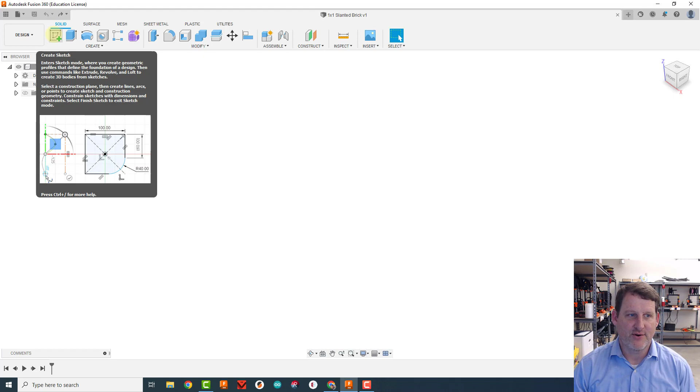To do this, I'm going to click on the Create Sketch button right here. It's going to ask me where I want to create a sketch. If I move my mouse around, I can be on the front face, the side face, or the bottom face. Because I'm creating a sketch of the side face, I'm going to choose the side face. I'm going to click, and it's going to rotate that around for me and create a sketch.

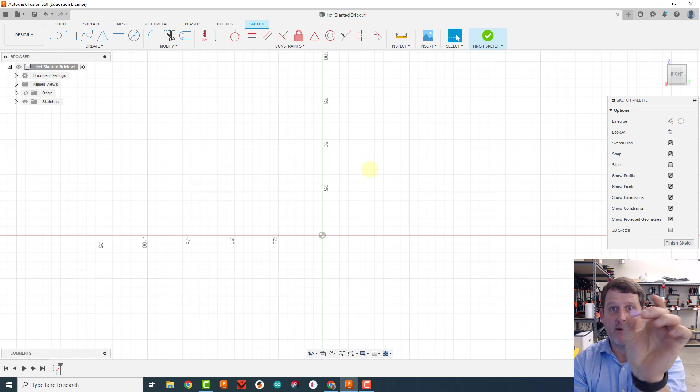Now what I'm going to do is actually start in this back corner here. I've got a bunch of these pieces - if you want one, you can grab one and totally do this as well and follow along. So I'm going to start at this back corner, sketch along the bottom, up here, and around the two sides.

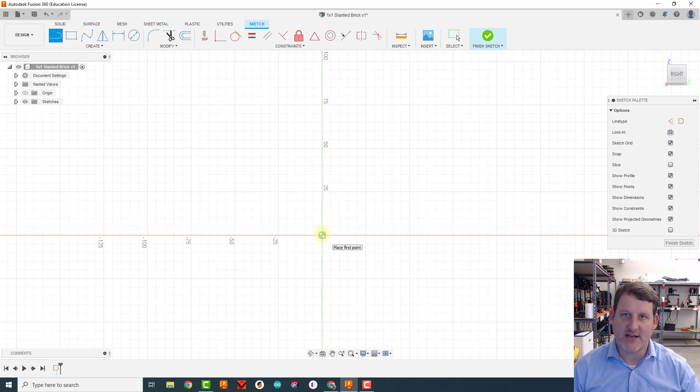Let's get started. I'm going to first grab a line drawing tool, so I have a line right here. I'm going to go right down to the middle of my sketch - I like to start my sketches when I can right in the middle, it kind of anchors them in one place. I'm going to click and drag a line over. Notice how Fusion is asking me how long is this side.

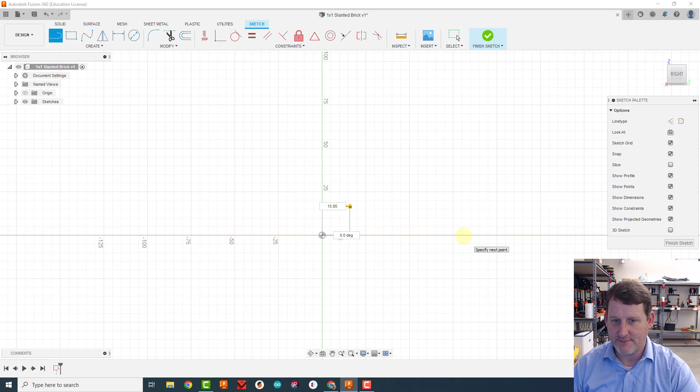So what I'm going to do is grab my handy calipers. I'm going to open them up and measure this bottom edge, which is what I'm putting into the program - that edge right there. And it says 15.85, so I'm going to type in 15.85, make sure it's at 0 degrees straight across, and click to set the measurement.

Notice how it's already asking me, it wants to draw another line. To get out of this, I can hit escape, or I can just draw my next line.

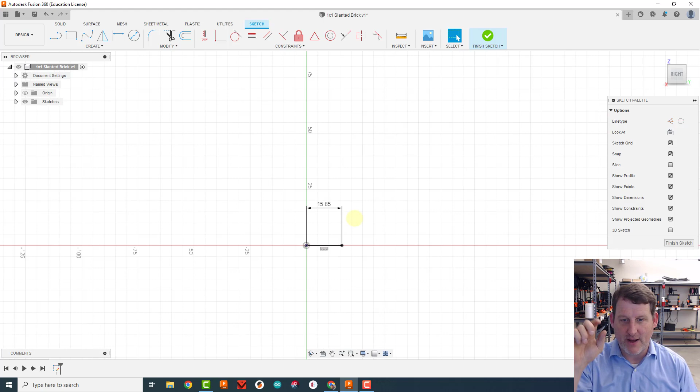I'm going to show you a few things. First, how do you zoom in on an object? Just roll your mouse wheel up or down and it will zoom in and out. I can zoom in really close, or zoom out super far away.

So I'm going to fill most of the screen with the drawing so far. Now notice something else. This part's super hard to get used to, but you will quickly. This looks like we've drawn a rectangle, but we haven't.

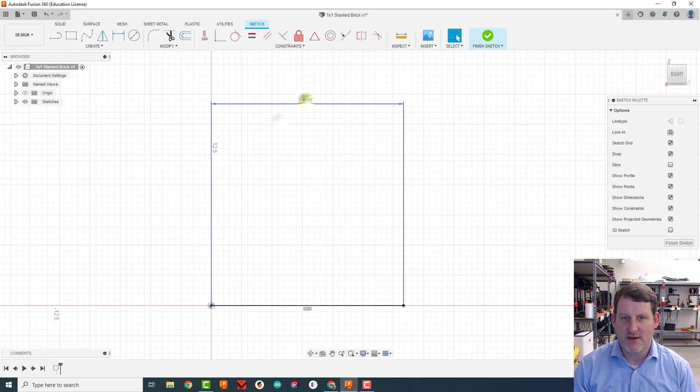This part on top is the measurement line. It tells you that this line, the real line down here, is 15.85 millimeters long. I can click on the 15.85 and drag it down below. It's just telling me how big it is. I can tell because these lines are thin and this line is thick. A thick line is a real line, the thin ones are measurement lines. If that's confusing to you, you'll get used to it soon.

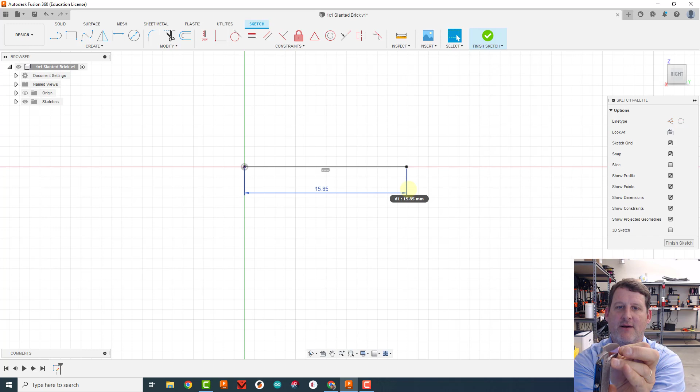The next thing I'm going to do is I've drawn this bottom line now. I'm going to use my calipers and measure how tall that back line is. Along the back edge like this, I'm getting 9.61.

If you want to use calipers and do this along with me, you can use your numbers too, not mine, they'll be a little different. So 9.61, and I'm going to push enter there. Now it's drawn the line for me. Everything's super happy. So far I've got 9.61, 15.85.

I'm working in millimeters right now. To check what you're working in, let's stop and do that. Over here on the left-hand side, it's called Document Settings. If you click this little down arrow, it opens up the settings. Mine say units millimeter. If I want to change that, I would hit this little edit key and choose a different unit. My advice for all the Lego stuff is millimeters because they're really small, it'd be easier numbers to work with. So I'm going to hit cancel.

Next thing I want to do is measure how far across the top is. So I'm going to measure it like this-ish. This one I'm going to be a little bit janky with. I can't get a perfect measurement, but I'm going to get as close as I can and live with it.

I'm getting 8.26. So to draw that part, I'm going to take the line tool, start here on this line, and draw over. I'm going to say 8.26, and hit enter to draw the line.

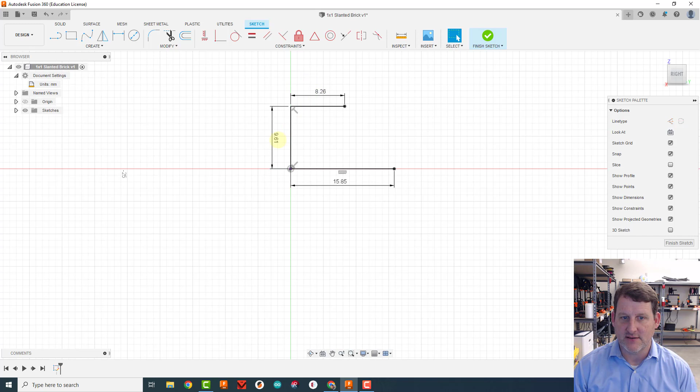So far I've drawn 3 lines: the bottom, the side, and the top. I need to come down at an angle and then connect up with this little one.

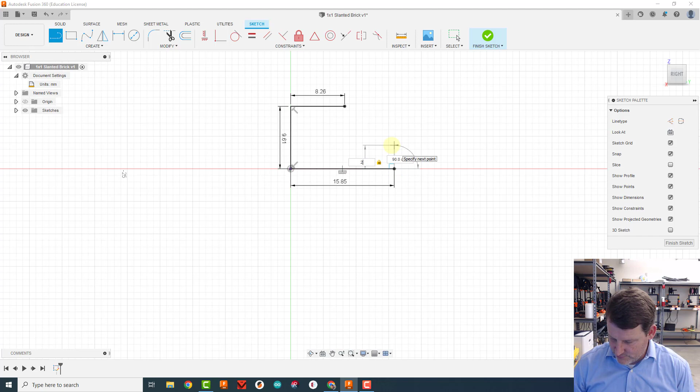To do this, I'm going to measure this little thing right here first. Again, I can't get a really good measurement, but I'm going to get the best I can. I'm getting 2.23 millimeters. So I'll click on my line tool again, come over to this end and drag up, and where it says distance, I'll type 2.23 millimeters and hit enter. That's drawn that line. I'm going to take the measurement which is on the inside and drag it to the outside and just drop it out here.

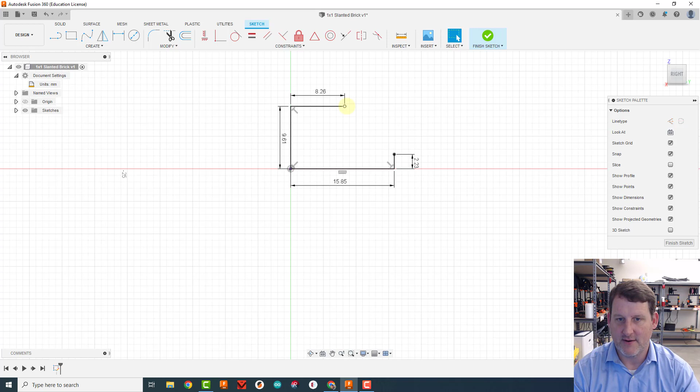Last thing I need to do now is connect this line to this line. That's this sloping part across here. If I've done all my measurements correctly, it should make a very similar feature, it should look just like the Lego I have, the side of it. So down here, all the way to this one, and click. This one I'm not going to enter in a distance for.

Notice that when I do that, let me check a few things. It looks a little wonky to me. Yep, that's good. Yeah, the top is a little wonky. This top is a square, it really should be...

7.8, not 8.2. So here's a nice thing: instead of starting over again, right now I'm in the line tool, so I'm going to hit escape to leave the line tool. I'm going to double click on the 8.26 and change it to the better value of 7.8, and watch what it does. It automatically redoes everything for me. So Fusion is really nice that way.

All right, next thing I want to do is extrude this. But let me show you what I just did before I move on.

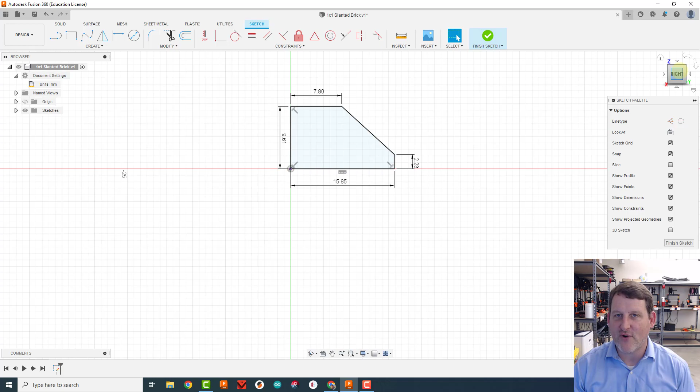In the top right corner of the screen is this cube. If you click and drag on it, hold your button down and move it around, you can actually rotate your sketch in all kinds of weird directions. If you get lost in where you are, rotate it around until you see the word called back, and you're going to click on it. Nope, not back, sorry, it's going to be left side or right side, one of the two.

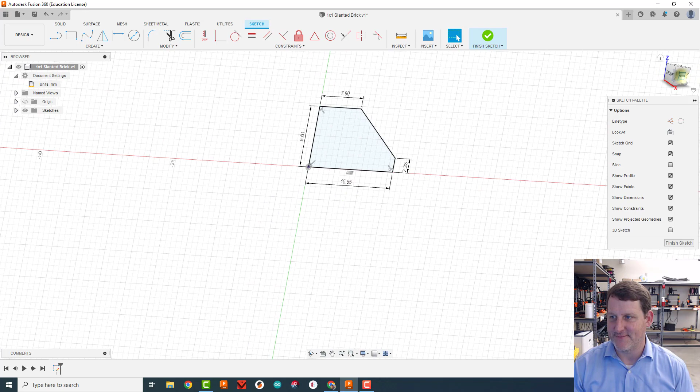I think we did right side, so I'm going to rotate it around. Yeah, we did right side. So you should have that image. If it says right here, you're good.

Okay, so what we're going to do now is we're going to extrude this. We're going to grab this shape and pull it into existence. E for extrude is the easiest way to do it. I'm going to grab my cube here and just tip it a little bit, not too much, just a little bit. Now I can see the arrow that I'm extruding. I can grab this arrow and literally drag it, and I'm making the object now.

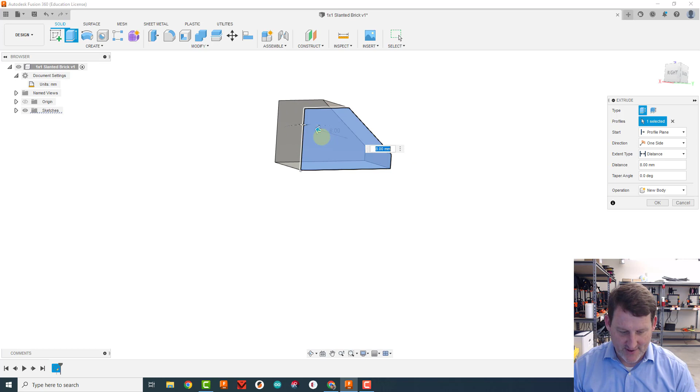So that's pretty cool. To figure out how far I have to drag it, I want to measure how deep this is, how far this is. So I'm going to go right here to the back and measure that. And that's 7.82. Enter. And now I've got my object.

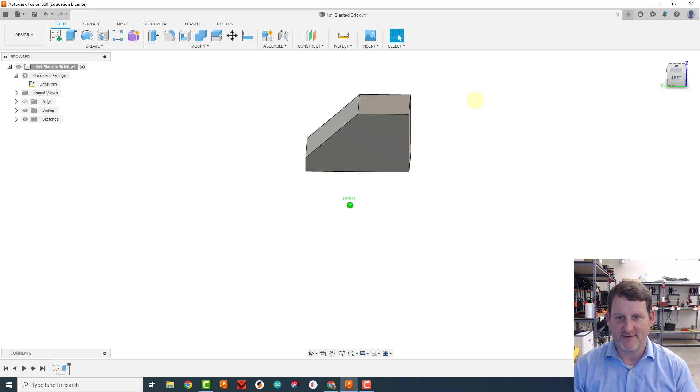If I grab my cube up here, I can rotate it around and take a look at stuff. So that is pretty sweet. We are almost done.

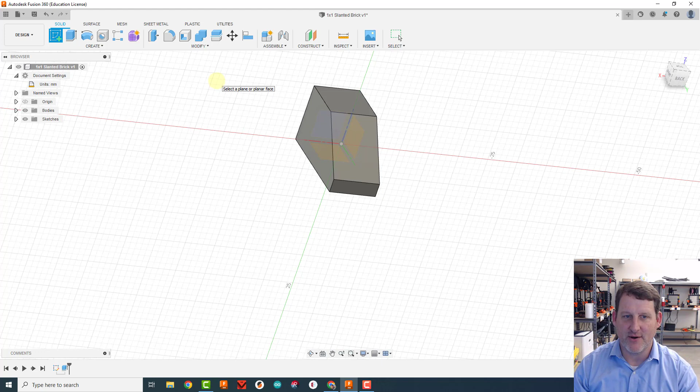I'm going to use what's called a construction line. Now, you're learning a lot right now. You don't have to know all this, so don't get too freaked out about it. I want to know where the middle of this top is. So I'm going to create what's called a construction line.

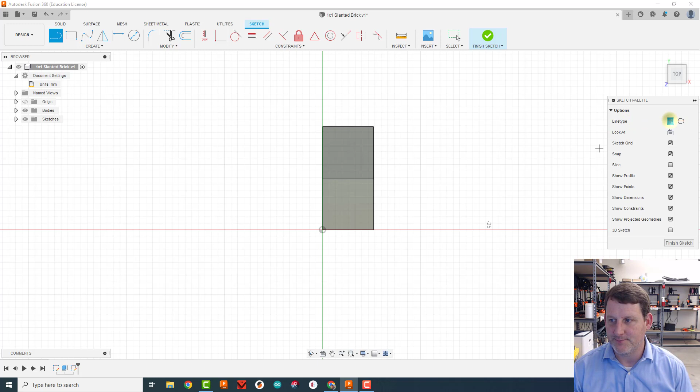I'm going to turn on the line over there, select my line feature, come over here to this options over here where it says line type. I'm going to turn on this first one called construction. And then I'm going to come back over here. Notice how it turns blue.

I'm going to come over here and go to a corner of, oh, here it is. This is the square, this is the top. If I look from the side, that's the slope. That's the top. I'm going to click back onto the top view.

Top corner to bottom corner, or you could have gone in this diagonal this way. And I'm going to add another one actually across the other diagonal. Put an X in there. Where this X crosses is the center of that square.

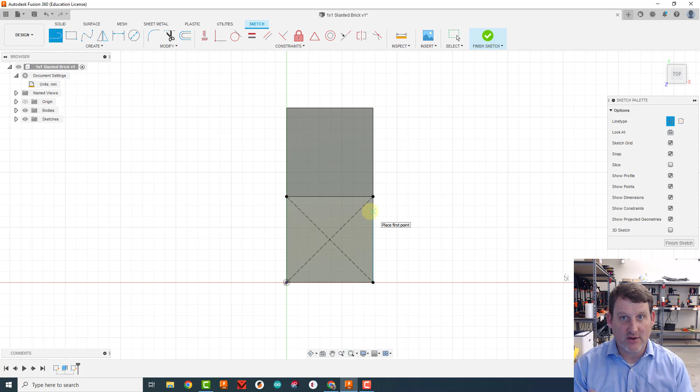Now, one thing you could notice is that when you're doing a construction line, it's a dashed line instead of a solid line. That means that you can't extrude this. We'll talk more about what that means later.

To draw a circle, all I'm going to do is come up here and I'm going to grab the circle tool. I'm going to go down to where I see the center point. A triangle means midpoint or center point. So when you see a triangle, that means you're at the midpoint. I'm going to click on that and drag the circle out.

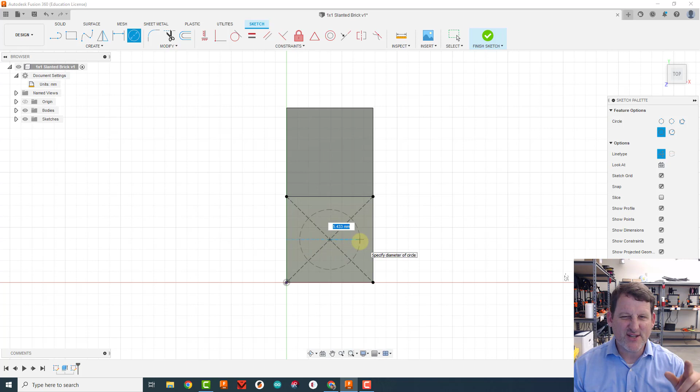Notice the circle is a dashed line. That means my construction line is still turned on. I'm not going to do anything. I'm just going to go over here with my mouse, turn construction line off. Notice how the circle went to a solid line. That's what I'm looking for.

And now I'm going to measure the width of that circle. So I'm just going to put it there like this. I'm going to say 4.78. Enter.

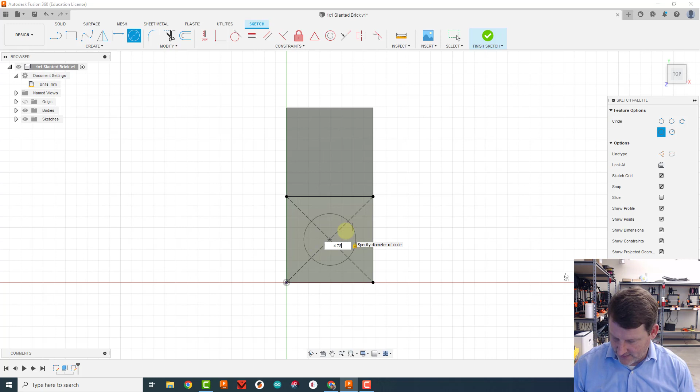Awesome, so that is that circle. But notice that there's no height to it. If I rotate the screen around a little bit, there's actually nothing there yet. I need to go E for extrude, click on that circle.

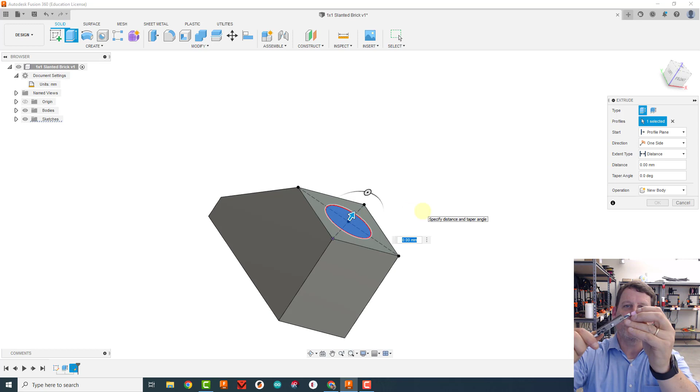And that's it, we made our first model. So we can see it's solid, it's not hollowed out. It's not quite done, but we did a really nice job. We got an idea of what we do. The main process is you create a sketch, draw the shape of the thing you want to extrude, and then extrude it out into reality.

Super cool, great job. I hope you got familiar with stuff.